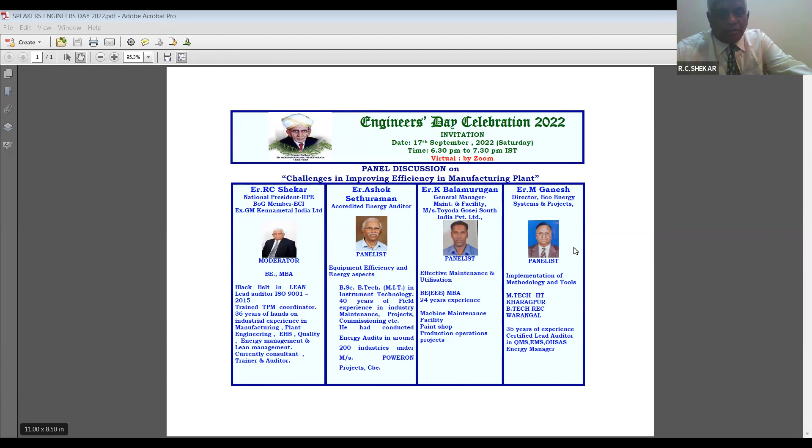Today's topic is improving efficiency and effectiveness of manufacturing plants. This is a very vital subject. Globally and nationally, we have embarked on sustainable development growth with 17 aspects, and this efficient and effective manufacturing plant finds its place in most of these development goals, so this topic assumes great importance.

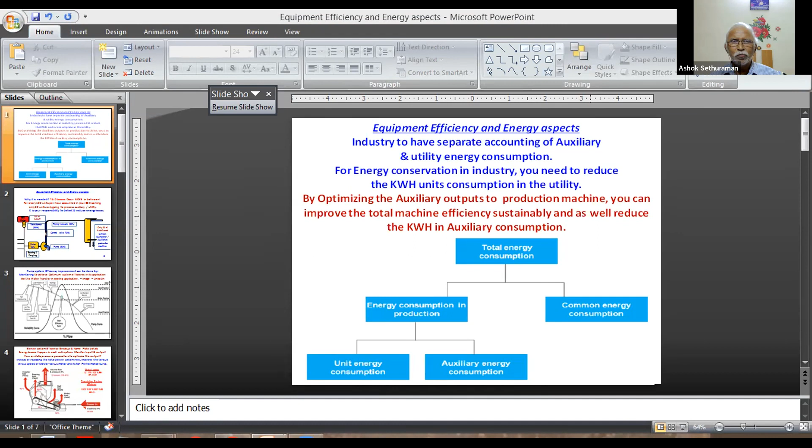Thank you, I'll just share my screen. Is my screen visible now? Yeah, but we should make it bigger, it's still not full view, still not big. In the bottom you have to put this one, the slide, you have to make it full screen. Okay, one second, full screen, you can select.

Equipment efficiency and energy aspects: there are two types of auxiliary consumption, energy consumption, and utility consumption. In the industry, for utilities we concentrate on conservation to reduce units in electricity or energy consumption. Whereas for optimizing auxiliary outputs given to the production machine, there's a basic difference - we can optimize the auxiliaries to maximize output and improve total machine efficiency sustainably. This will also help reduce the kWh, and for the given equipment as a system, the specific energy consumption definitely improves.

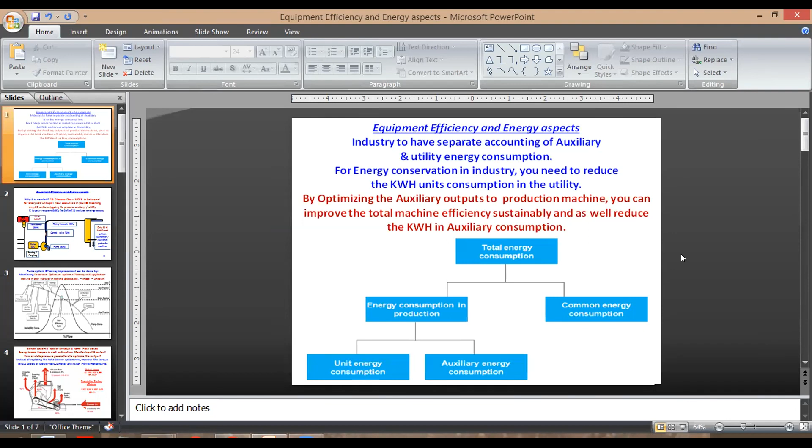If we see why it is to be done - the T&D loss, what is happening nationally is around 20%, and this is happening in the industry also. For every 100 units of your EB incoming, only 30 units is reaching the ultimate process auxiliary or the production machine or production utilities.

We have a scope of energy efficiency at the transformer, at the motor, at the bearings and couplings, or at the linkages, power transmission linkages, then on the pumps, then on the control valves and piping network, then comes to the process auxiliary, the heat exchangers or auxiliaries of production.

Here we find there is a scope, thanks to the latest 5-star ratings for equipment, not just on the domestic side but on the industry side also. We have IE3 and IE4 motors, taken up by many new or latest industries. They have gone for this, going by the National Motor Replacement Program, and are able to replace 10 HP motors and improve upon it.

Then coming to power transmission, many industries are leaving away V-belts and other things. They are going for cogged belts and resizing their pulleys to improve power transmission from the motor to the blower or to the pump.

Then comes the control valves or piping, where the scope is much more, because we have pumped in so much excess energy. The piping has already gone totally scaled and the line size has totally changed as such. If this also needs to be addressed, definitely the system improves a lot.

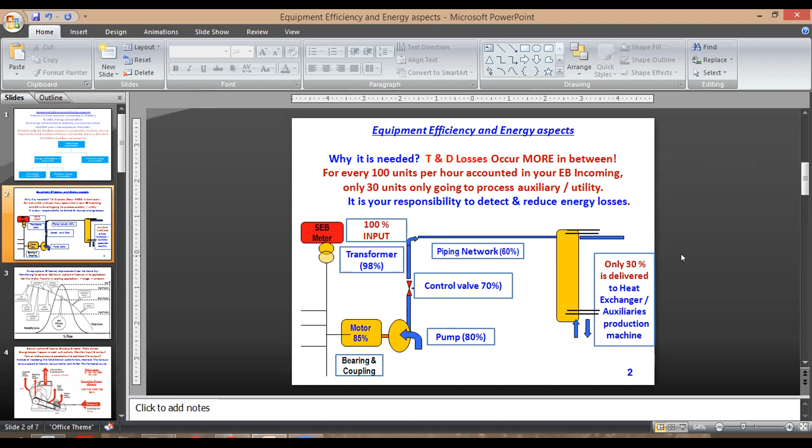Coming to the basic utilities or the auxiliaries, either the pumps or the blowers or the compressors, we can see the optimum system efficiency on the given pump, especially on the water transfer, on the cooling water application, especially on the chillers or any of the equipments where you are using this for this cooling application meant for the heat transfer. The velocity or the flow rate is very critical, where you can see the pump reliability.

We have a model wherein we go by the pump curve, and we see the reliability curve, and we achieve a system improvement by going for the best practice or the ideal practice or the better practice, where you can see the low bearing life of the pump, cavitation is less, and the best efficiency point of the pump is maximum utilized, taking care of the reliability also.

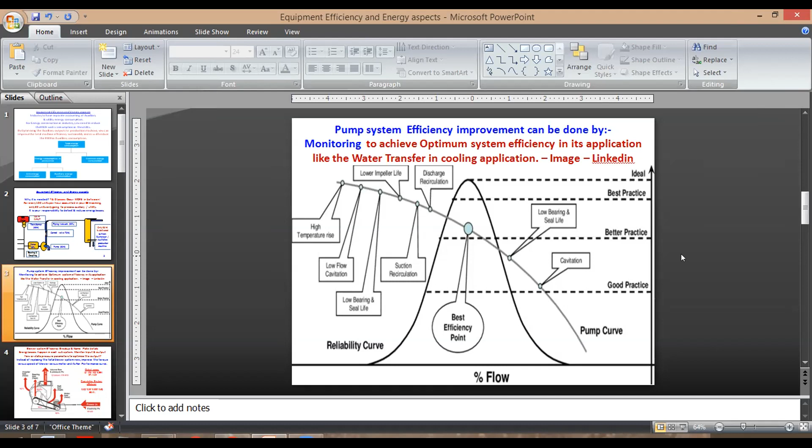This is not only for the case of pump, it includes the pump straighteners, pump suction strainers, and the delivery, where the input and output pipings for the pumps also matter. So replacement of pump alone is not important now. The total system is what matters, that is monitoring the parameters of the suction and the delivery; this also matters to the pump process application, especially whether it is delivering to the equipment or to the production machine.

If you take the case of blowers, again here also the typical blowers running in the industry over decades have only 50% efficiency, though the Bureau of Energy Efficiency says you can go up to almost 70 to 80%. On the existing subsystem itself, we can see the breakup of the energy consumption going by the Sankey diagram of the blower system. If you give 60 kilowatt, almost 92% across the motor efficiency. On the belts and pulley efficiency, it is said it is around 99, but in many places it is losing around 5 to 6% also.

Then on the bearings and couplings, then comes the impellers. The impellers you selected some 10 years back, whether a forward curved impeller or a backward curved impeller, are they delivering the same flow rate and static pressure? So if you find the ultimate cumulative system efficiency is only around 50 to 60%, there is a scope for improvement up to 20%.

So here it is not that we have to replace the total blower system. Even on the existing system, if you are able to improve the efficiency of the subsystems, especially the motor to an IE3 motor, and the belts and pulleys by going for cogged belts with VFD drive combinations, this also optimizes the torque given by the motor to the blower, and ultimately variable torque motors, especially on blowers, centrifugal pumps and even centrifugal compressors.

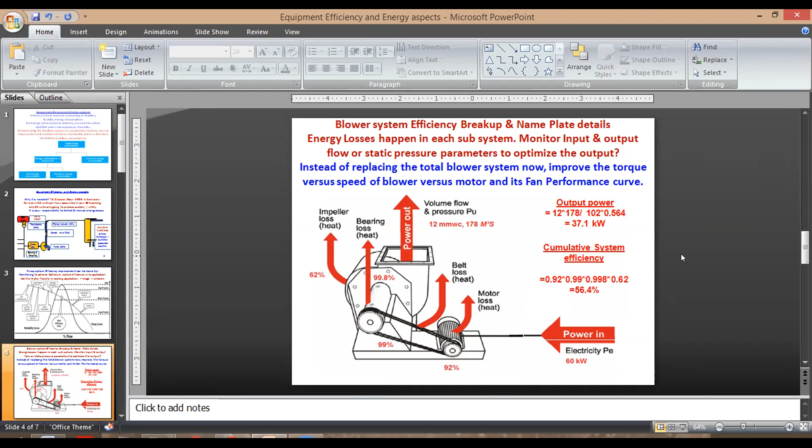For all these motors, blowers, pumps or compressors, the ambient air surroundings are more important. If you see the relative humidity, especially in our Indian conditions, between 50% humidity and 80% humidity, the kg of water vapor per hour for every 1000 cubic meters per minute almost doubles.

So the cyclic and seasonal RH variation in the ambient surroundings, between day and night and season to season, makes a big impact on the blowers, the compressors, and the cooling towers, wherever they make use of the ambient temperature and RH. So there we have to take care, monitor this and improve the subsystem efficiency on the blowers, the compressors and the cooling towers.

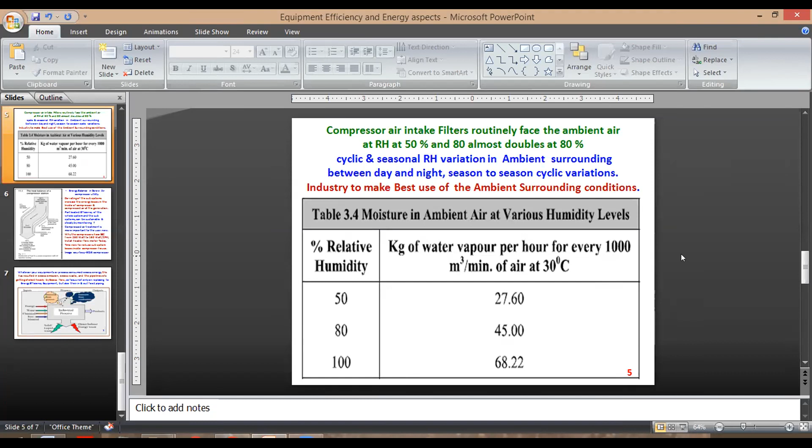So if the real output from the compressor is only around 12% of the compressed air, then we have to take care of the subsystem efficiency, like air intake: what is the air intake temperature and air intake RH, and how much the air intake filter can choke or give a maximum delta P. That has to be reduced, so it is made free air delivery at the air input of the given compressor. And also the part load efficiency of the compressors.

Normally, if you see all the compressors as a package running at full load, a 75 kilowatt machine delivering around 500 CFM is almost taking 95 kilowatt, because it is rated for 7 bar; still the total package is taking around 95 kilowatt. In many of the industries, they have started replacing the motors, especially from 75 kilowatt to 90 kilowatt motors, and they are able to save energy. And if you are trying to buy a new compressed air system, go for a higher pressure and operate it at a lower pressure.

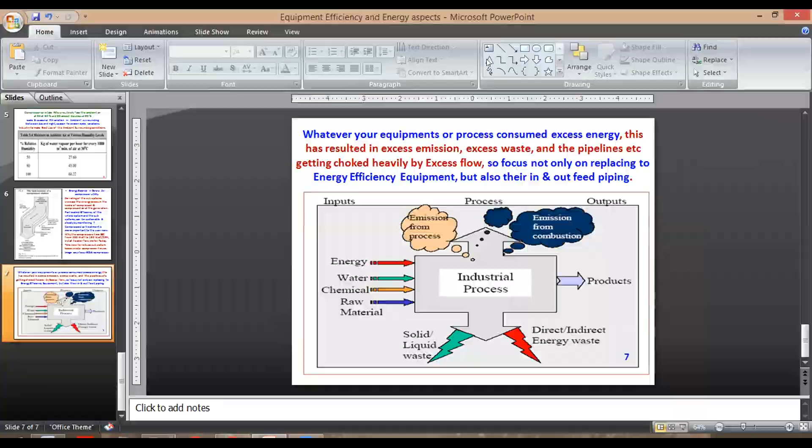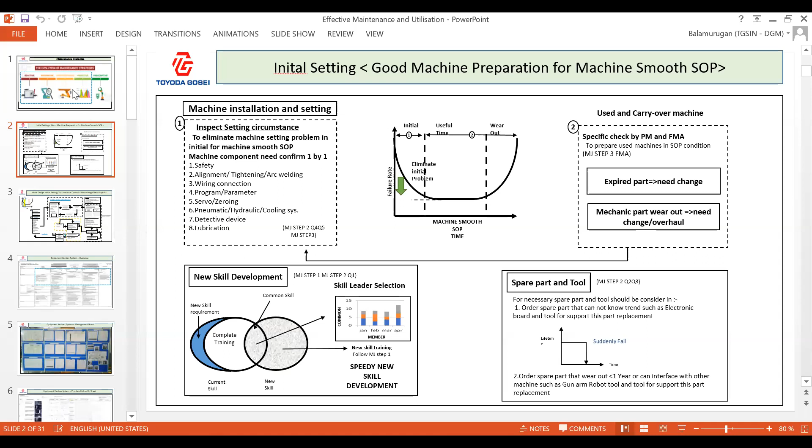So, Mr. Ashok, can I now request Mr. Balamurugan to do his presentation? Mr. Balamurugan? Yes, sir. I will do my presentation. Thank you. So my screen is visible? Yes.

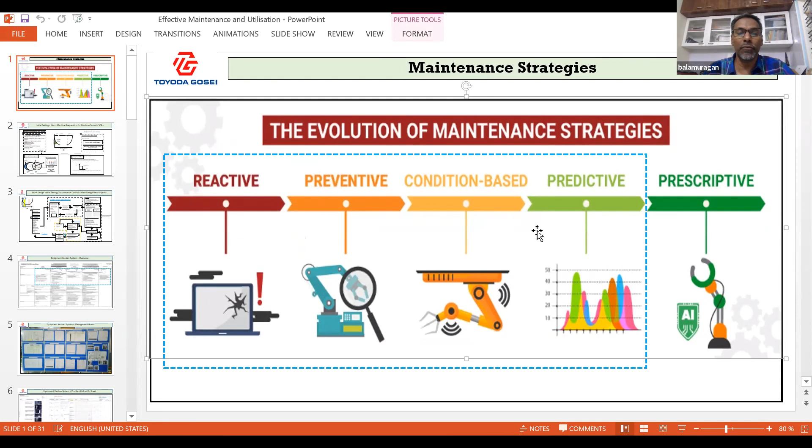This is the evolution of maintenance strategies happening globally in the market. One second. As TGSIN, we are still around reactive, preventive, condition-based and predictive maintenance. We still have a long way to go for prescriptive analysis, which is basically AI-based. But definitely by 2025 we'll be reaching that with respect to equipment, considering the skilled manpower in the future. This is one important factor for any maintenance.

This is a slide which shows the basic necessary requirements for any maintenance activities. We call it the initial setting. Good machine preparation for machine smooth SOP. SOP is smooth operation. There are 4 factors that we need to consider. One is machine installation and setting.

Any machine, when it is installed properly at the initial stage with all the conditions, with all specs and confirmations, then the problem at the initial stage itself is very low. Only the wear and tear comes into the picture. So this plays a very key role.

Here, inspect setting circumstances to eliminate machine setting problems initially for machine smooth SOP; machine components need to be confirmed one by one. How we confirm is safety, alignment, tightening, wiring connection, program parameter setting, servo zeroing, pneumatic, hydraulic, cooling system, detective device, and lubrication. These are the basic confirmations during machine installation.

Next, this graph shows the failure rate on the y-axis and machine smooth operation time on the x-axis. After SOP, you can see the wear out of the machines. Here, what is it that we need to do? This is for the used and carry-over machines. Once this stage comes, how to take care? That is by specific preventive maintenance through failure mode effect analysis.

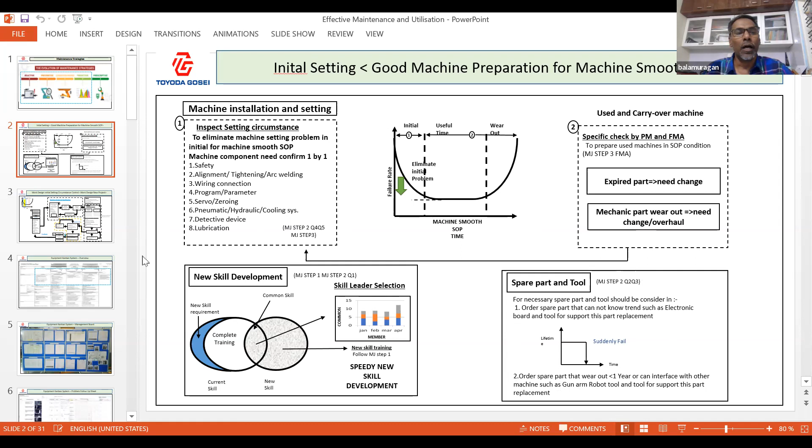So these are the 4 factors which need to be considered for good maintenance of equipment before we hand over for production, so that the problems will be less. And before that stage, we call it the design stage. This is what we follow: the work design, initial setting, circumstance control. One is the initial, then useful time and the wear out time. Considering this as a factor, the target is smooth machine SOP, 0 setting mistakes, 0 long time repair.

And what is the source? Feedback from previous projects. For any new machines, when we are buying similar machines, what are the reflections we need to take based upon the previous equipment, what we failed to incorporate? That should be the reflection. Here, from machine breakdown history, equipment installation standard, the new machine drawing and manual, technical confirmation, Yokoten based upon others. So this is the key source which we need to consider for new machine spec.

And when it comes to machine design and specification, issue machine design feedback by history and Yokoten. Same machine and portion Yokoten, in terms of safety, machine infrastructure, requirements on the design feedback sheet. This should be filled up. Next comes the discussion with PE, plant engineering, and process design, drawing confirmation by the maintenance team, and issuing the problem punch list back to the design team. So this is how the PDCA works.

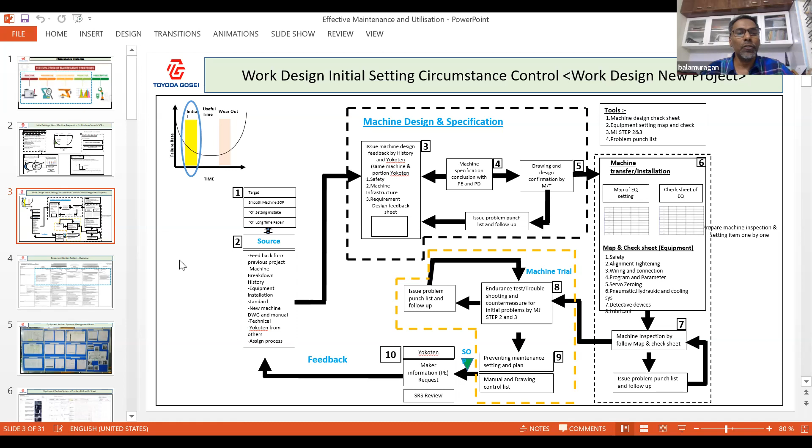So with this base, what we follow at Toyoda Gosei is, as you can see, a Kanban system for equipment. When a machine is being procured, ordered, and when it has come to the site for installation, we have 4 types of Kanban: white Kanban, pink Kanban, yellow Kanban, and green Kanban.

White Kanban is the equipment confirmation before the power-on condition. That is, whether the equipment has come in the right shape, since even in transit some damage can happen. So before pre-start of the machines, this type of checking will be done. We have a checklist which I could not share now because it is a detailed check sheet.

And pink is mainly to confirm the safety function check. Once the machine is installed and confirmed by the project in charge, the safety function check will be done by the project in charge along with the safety department. The yellow Kanban means it is tuned for production, where the trials will happen and the production trials will be fine-tuned. And the green Kanban means the entire function check and quality confirmation. Finally, handover takes place with the proper PM check sheet and the quality confirmation.

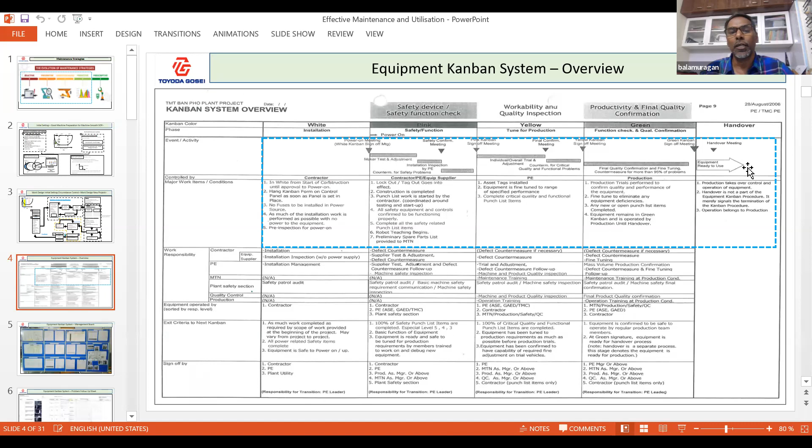So any equipment installation speaks only about the final part quality. In the detailed sequence of the cycle, starting from equipment installation, the quality of installation, the quality of activity, the quality of skill, everything is visualized, evaluated, and then handed over to production. This is the system that we also follow at Toyoda Gosei.

And this is just an example of what we have. Sorry, it is not clear. This shows the entire equipment installation schedule. This is the Kanban system. This is the pre-white Kanban check sheet. We have white Kanban, then pink Kanban. Then we have the problem follow-up sheet, followed by many static checkpoints. Then comes overall equipment safety and maintenance, like a PM check sheet, and handing over the machine to production and maintenance personnel. So this is basically to ensure the machine is made perfect and handed over to the respective process owners.

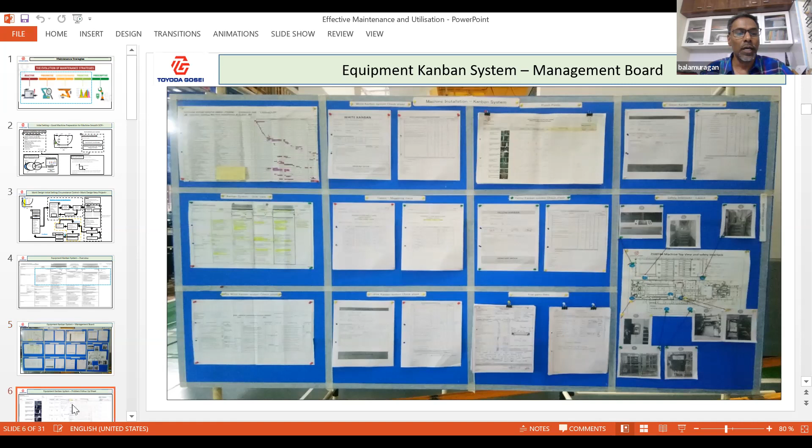And this is one example of the PFS sheet, which we call the problem follow-up sheet, for any new equipment installation or any equipment preventive maintenance. After that, for any equipment, first, safety is very important. This we call STOP 7+1. We call safety in Toyota the Zero Accident Project.

I think most of the people attending the program will know about A, B, C, D, E, F, G, H. A is actuator. Actuator means being caught or pinched by any rotating equipment. B means big or block, contact with a heavy object. It may be any tool moving, like loading of a press tool or an injection molding tool. C is car, contact with vehicles. Inside a factory, we use forklifts and towing trucks, so contact with vehicles is called car.

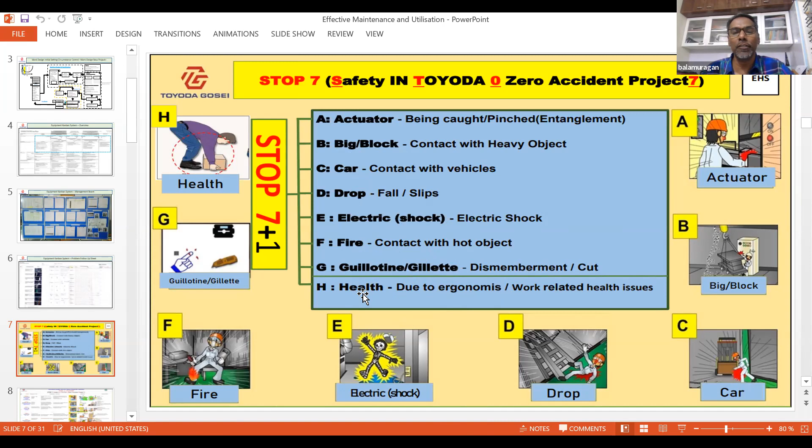And D is drop. Any load that slips from a height is called a drop. Electric is related to electric shock, and fire is related to any fire. It may be an electrical fire or any other, like a paint fire. G is Gillette, any cut injury. And health is ergonomics-related issues. So we take these STOP 7 steps in equipment inspection, and we ensure the equipment is handed over with all these basic safety features, so that it is good for maintenance personnel and production when they handle the machines.

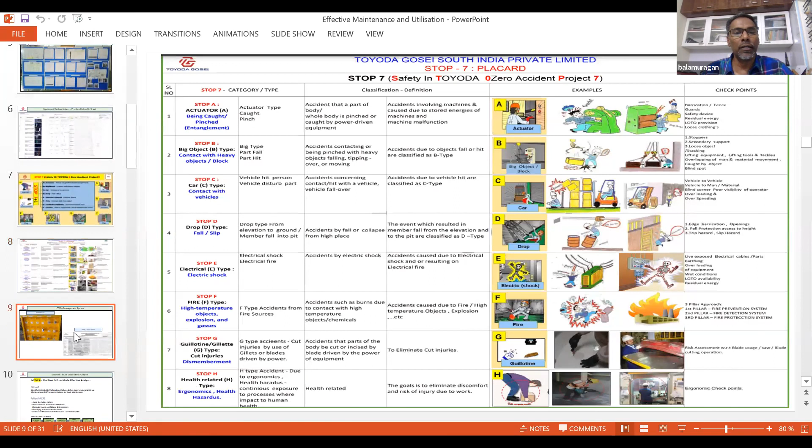These are a few explanations. Since we are short of time, I am skipping this. For any equipment, the LOTO system is very basic. This is our LOTO system board. LOTO we call lockout tagout. For any equipment going for maintenance, maintenance personnel should have the lockout system. He should lock out so that the control circuit is de-energized, and he can enter the machine safely, do the maintenance work, and come out.

And this is the sample daily check sheet for the LOTO board. When any person comes in, he takes the LOTO along with him, and when he completes his shift, he puts back the LOTO and enters it, which we call in and out.

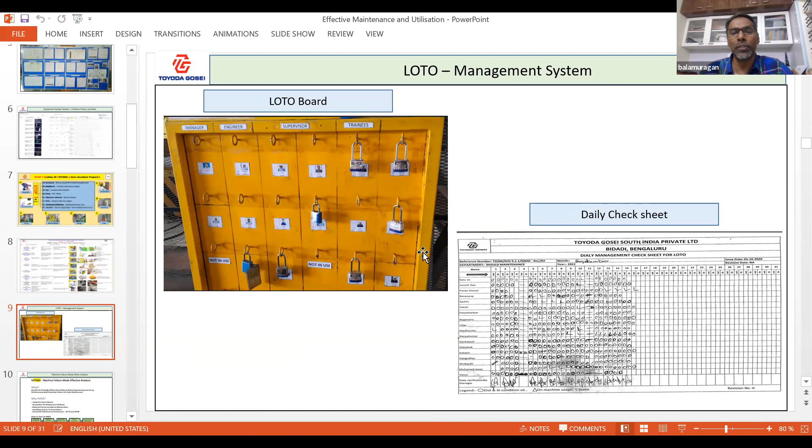So this is the safety management system that we follow for all the maintenance personnel. And I request all the companies to have such type of system, because many accidents what we see are due to the energy or power breaker just being switched on. For bigger machines, a third-party entry will almost always be there. So this type of system should be there for maintenance personnel before entering the machine.

And as equipment, we call it machine failure mode effect analysis. So this is a very key important point. Here it is to avoid future failures, standardize the maintenance method, eliminate forced and natural deterioration, identify the actions on each failure, and control the maintenance performance through MTTR and MTBF.

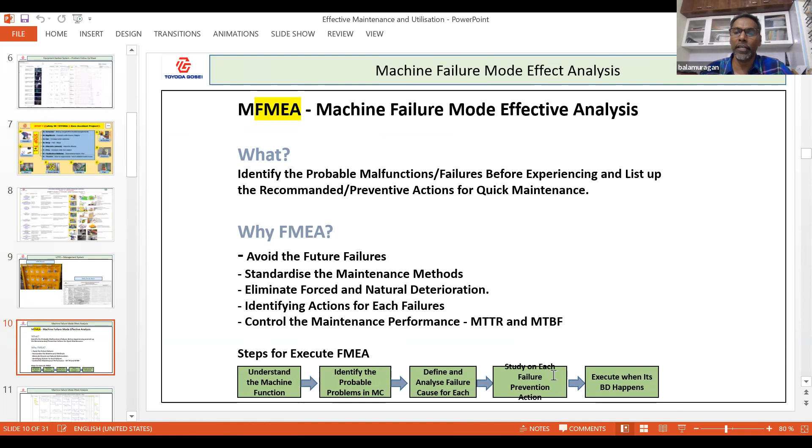And these are the basic steps which have been executed for machine FMEA. Understand the machine function, identify the probable problems in the machine, define and analyze failure causes for each, study each failure with preventive action, and execute when the breakdown happens.

And this is one example of what we do for FMEA for the machine: potential failure mode, probable causes, potential failure effect, prevention method, and recommended actions. We arrive at severity, detection, occurrence, and prevention, and we categorize based upon the RPN rating. So this is just an example. I think most of the companies will be following it.

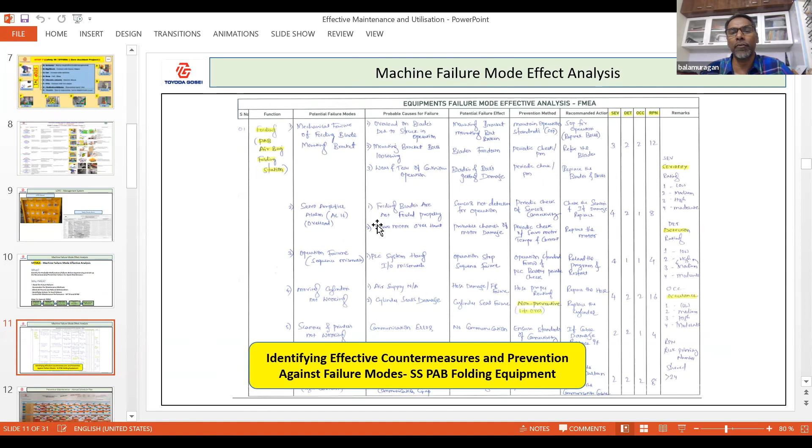So this is the very basic step for any equipment maintenance, how we arrive at some basic predictive or preventive checkpoints. And this is the sample check sheet, like a preventive maintenance annual schedule plan, what we have. For any injection molding machine, there should be an annual plan. So this will be made before, like in January or February, for the next financial year.

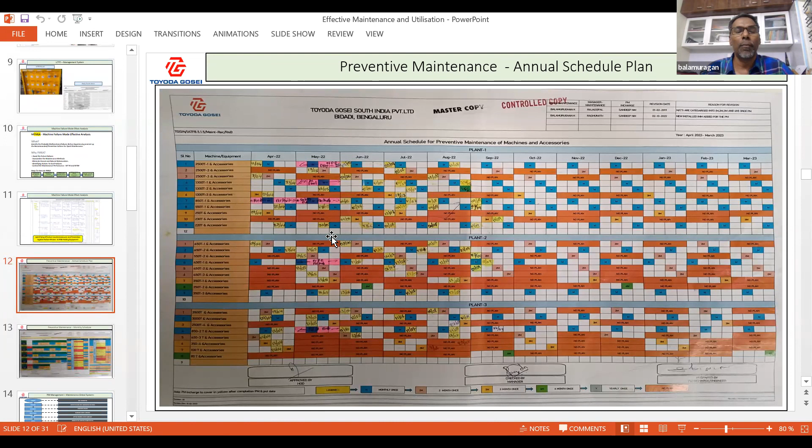We follow the financial year for the maintenance, and this will be circulated across the production functions to hand over the machines based upon the dates. 90% it happens, 10% it may not happen due to the production schedules, but that will be caught up during any holidays. And this is the monthly plan.

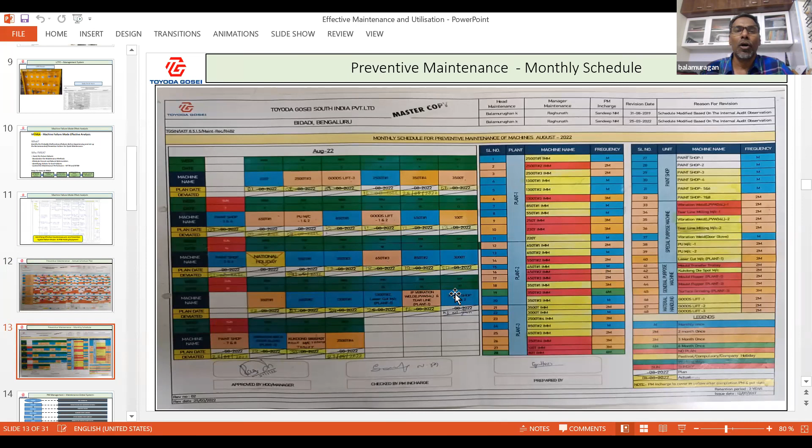Apart from the yearly plan, monthly, based upon the production volumes and any breakdowns, small changes will be there. So monthly schedules will be almost 99% perfect. And this is how we follow TGSIN, how we take care of the monthly schedule plan. And before we go to the check sheets, these are the basic minimum content that we need to have as a preventive maintenance management system.

This should be based upon the criteria. The company can have their own criteria in-house. So we have our own criteria for the PM checking of machines. It is not that every machine will be going for a check every month. Some criteria are fixed.

Why I have taken the contactor is, our target is zero fire and zero fatal. And due to contactors, many fire incidents happen in equipment. So we give more importance to electrical contactors, relays, earthing resistance, and insulation resistance in machines, which are checked periodically.

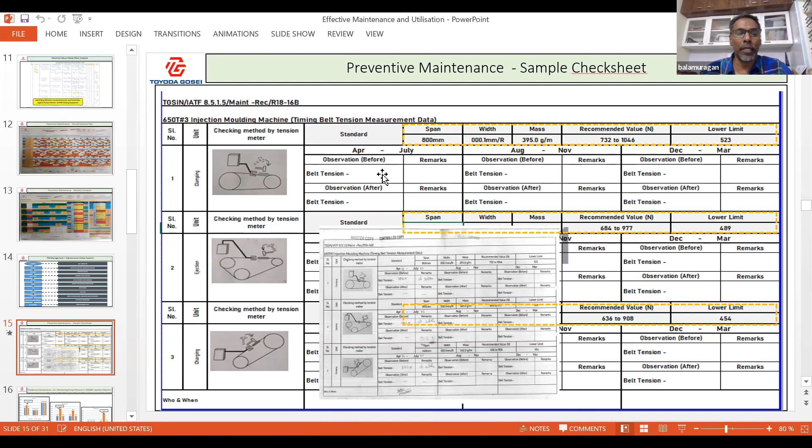But nowadays this has been converted to sensor-based and AI-based monitoring, and we take the data directly from the machine. So this is how the trend is changing. But these things need to be monitored to see that the machine is not being pushed to breakdown, so that we can take predictive actions.

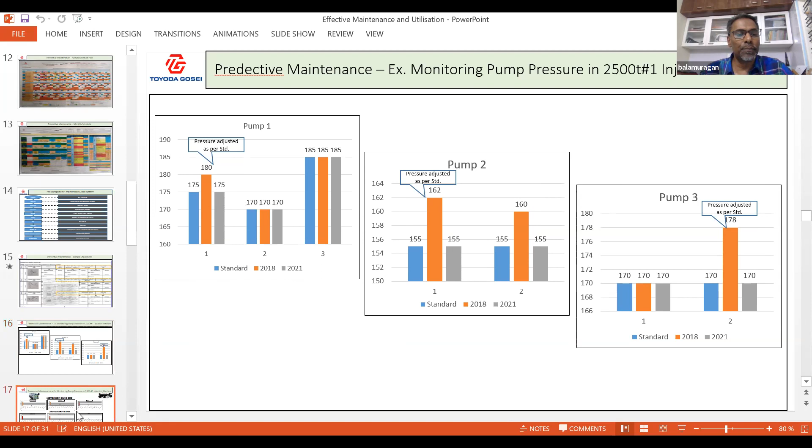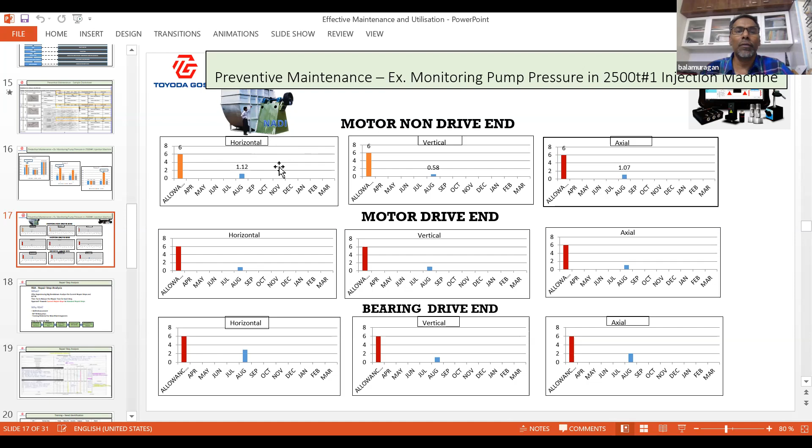So many blowers we use in the paint shop, so it is a very huge task. Based upon the data, we take actions so that the maintenance time can be minimized, and maintenance personnel also can be minimized. This is indirectly a cost cutting, but it is a digitalized data-based approach.

Next, we call this repair step analysis. After experiencing a big breakdown, we analyze the current repair steps and mean time to repair. Then we try to reduce the repair time for each step, approaching the current repair steps toward standard repair steps.

What is root repair step analysis? Skill enhancement, MTTR reduction, and training material for new maintenance engineers. This is one of the key factors everybody should think about, because skill and knowledge based upon experience is most important. So the steps involved are: understand the actual root cause of the problem, list out the current repair steps, think about repair step reduction, and compare with the corrective action and the standard action.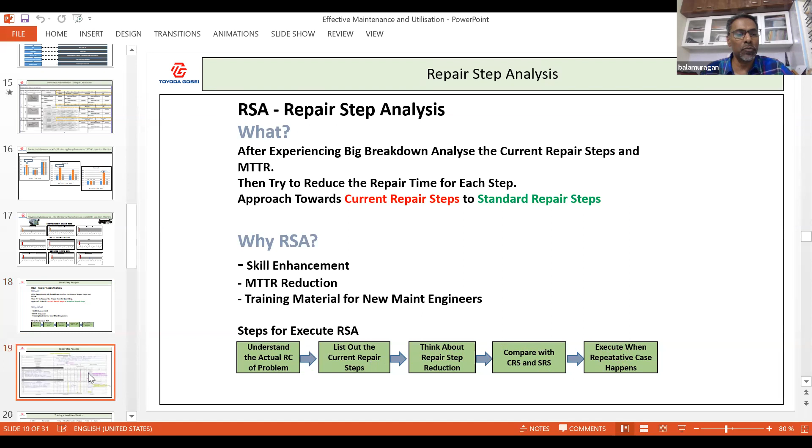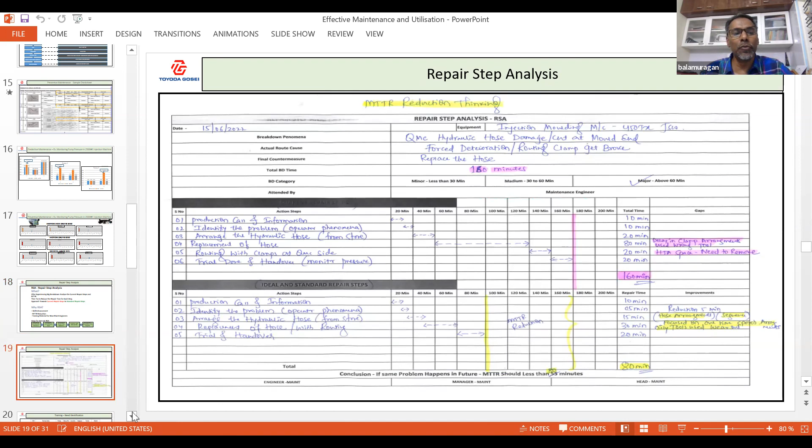Execute when a repetitive case happens. This is one sample check sheet showing before and after, with a Kaizen point reducing from 160 minutes to 80 minutes, so that this becomes the standard and the mean time to repair can be minimized. So to do this, skill is most important.

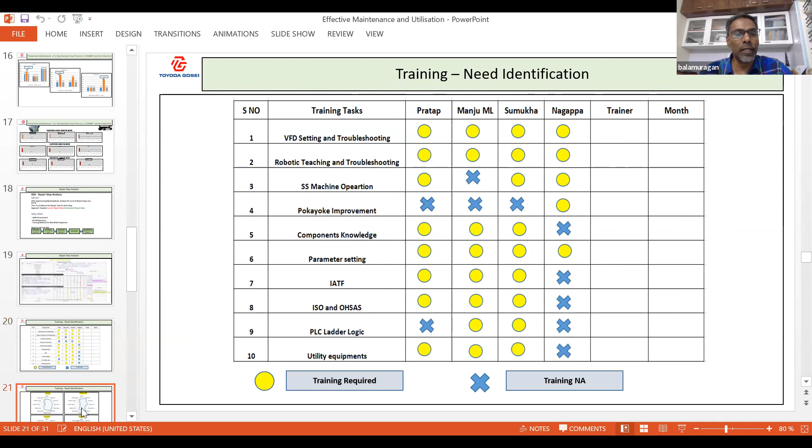Any company should have a training need identification for maintenance personnel on various aspects for the members. This is just a sample sheet I am projecting here, showing the training tasks needed across each member, what is the current level today, and where they are going to reach over the years. For example, today by 2022 if the skill is like this, by 2024 or 2025 what is the expectation and what it's supposed to be. So this is how we monitor the members' performance with respect to maintenance.

So I have touched upon training. Next comes spare parts management. We are on SAP. Whatever spare parts we define are based on VED analysis: vital, essential, and desirable. Based upon that we make the list, and we order the spares with the reorder level we have defined, and the lead time, and it gets ordered directly through SAP when the stock goes down. This is the system we have at TGSIN.

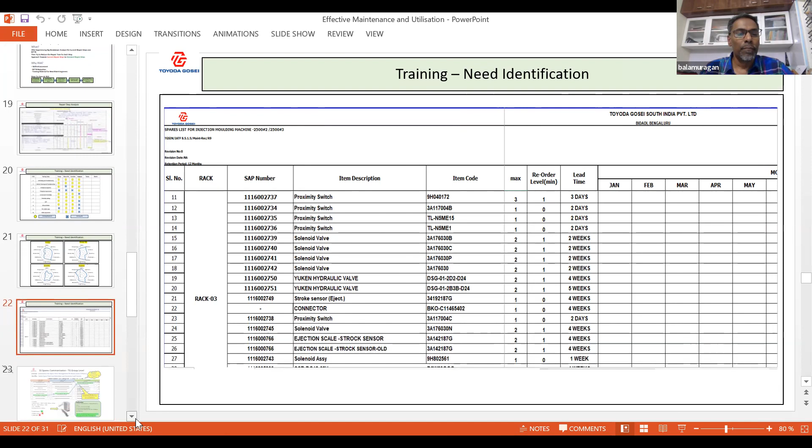The next slide shows energy monitoring and smart production monitoring system to improve OEE. Now OEE basically speaks to productivity, quality, and availability - performance, quality, and availability. For example, here it shows availability as 43%.

On manual data, whatever we do, a lot of mistakes happen, or it gets wrongly projected. We have connected injection molding machines to cloud computing to take the data. And for each product we have a QR code, a laser-printed QR code, and every product is accounted for through a reader, which is directly linked to SAP, so that we get the right production count, right energy reading, and right hourly monitoring.

So when availability is 43%, then actions come from production, identifying where the problem is and what actions we need to take.

Most of the problems, everybody says maintenance issues, but maybe the planning is not good, or there is member absenteeism. This gives the real-time data on where the problem is and how to act upon it. It also gives data on energy, like which machine has higher consumption, which has lower consumption, and why the per hour production loss is there.

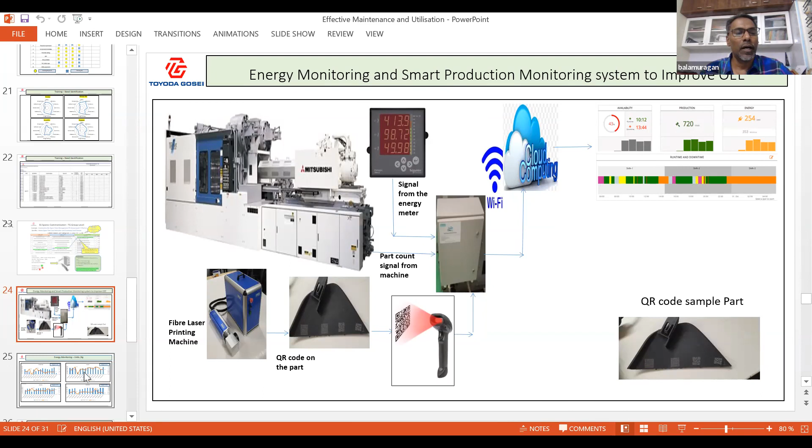So this type of data we arrive at, and this is one example of how we arrive at units per kg for injection molding machines. This is like 4 machines we have taken as an example and are projecting here. The target is 0.35 units per kg, but what actually happens is like this, and even on Sundays some units are consumed. This is called low hanging fruit, where we need to project to production and inform them why the machine is simply on during Sundays. That should be the first step.

Then when we fix a pattern every day, like Monday, Tuesday, we have a standard pattern, not every day different mold changes. We have a pattern. So if it is the first Monday, again the 6th or 7th, it should have the same energy consumption. Why is there a variation? This needs to be analyzed and informed to production, what is the downtime? So this type of data needs to be utilized to take corrective actions.

So this is how we are currently moving on, and this will improve the efficiency and OEE. This ends my presentation. Thank you.

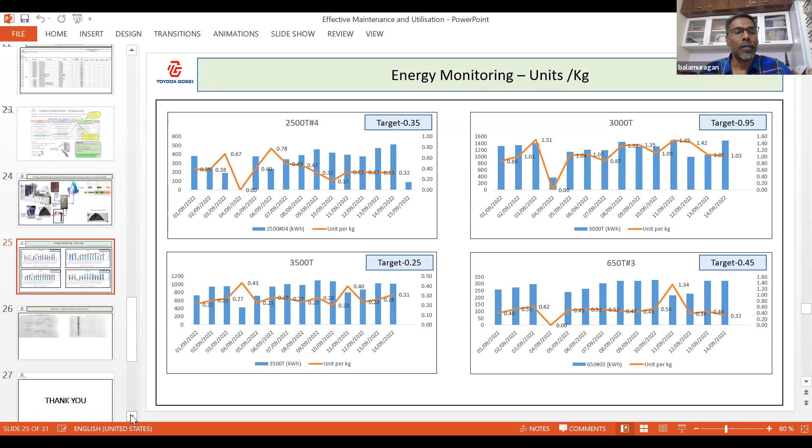Good evening everyone, thanks for giving the opportunity to do this presentation for celebrating Engineers Day. The time available is very limited. I had actually prepared for a longer duration, so I'll be skipping some of the slides, even though I wanted to tell more. Sorry for the inconvenience if I skip some slides. So the idea is improving the efficiency in manufacturing plants. Today's topic theme is challenges in efficiency in manufacturing plants. What are the challenges? Let me go into that.

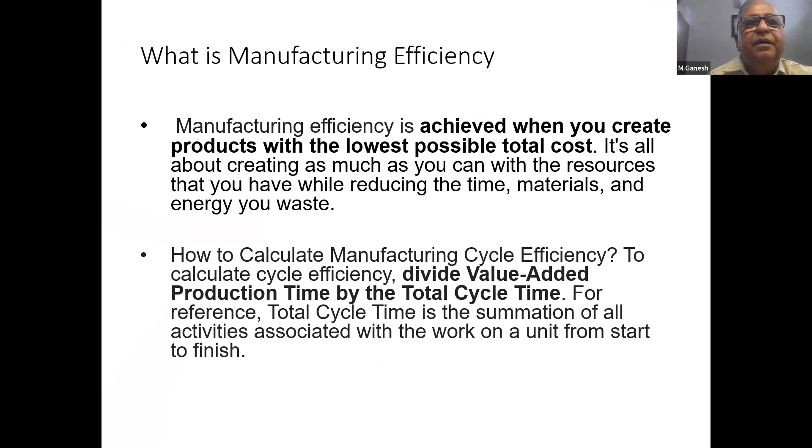Before we understand this, manufacturing efficiency is achieved when you create products with the lowest possible total cost. It's all about creating as much as you can with the resources you have while reducing the time, material, and energy you waste. That is the basis of manufacturing efficiency. It can be calculated by means of a standard, in terms of actual output to standard output, and the ratio gives you the efficiency.

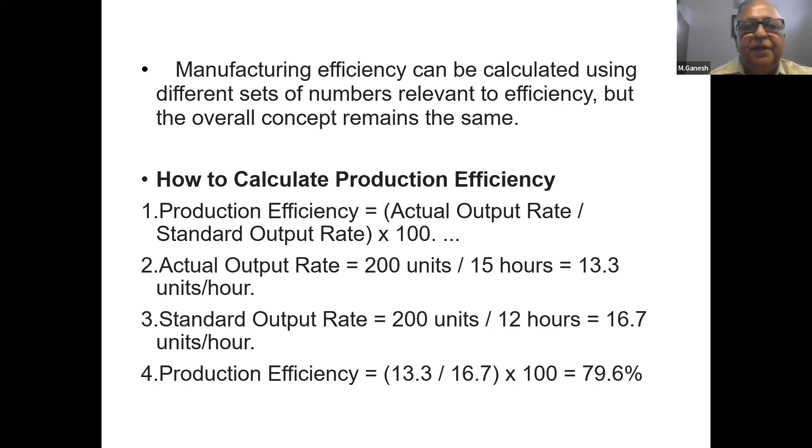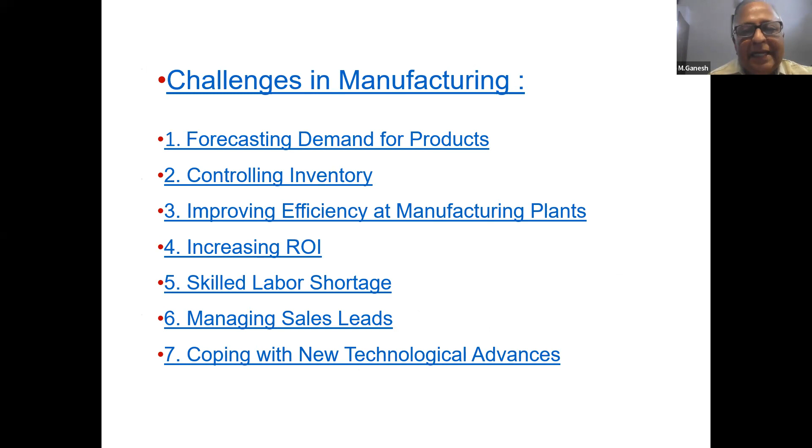First, basically, an overall system has to follow a certain standard. I prefer ISO 9001:2015. This quality management system gives you a very good guideline to ensure you can set all the activities right, from the start to the final product delivery. We have to ensure process procedures, flow charts, operating control procedures, and SOPs are available for how you have to do various activities.

There has to be top leadership commitment, and respective unit heads and role responsibilities have to be very clearly defined so they know the job they have to do, with no conflict of work activity. And to improve, there has to be objectives and targets. We have to set targets so that gives guidance for achieving certain set targets in terms of quality, progress, and no defects.

Risk assessment is again a very, very important parameter. We have to know, during the entire process of manufacturing, what are the risks actually there. We have to assess the risk and determine the mitigation plan. Communication has to be made very clear, so who will communicate what and to what extent.

Another important parameter is internal audit and management review. So we have to do a complete thorough audit of the entire process, checking for various drawbacks and non-conformance to the set procedures. And finally the improvement part, what we have to do next to improve the manufacturing efficiency.

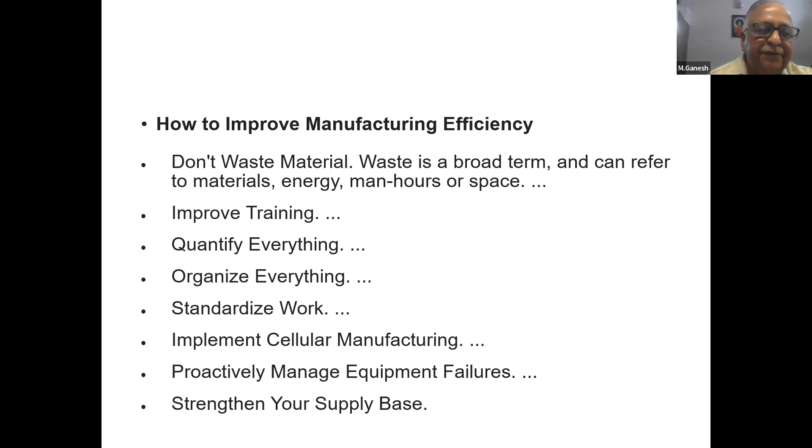Strengthen your supply - that is all our supporting service providers, the suppliers, vendors and contractors. You have to have a very good link and relations so that they provide you, because these are the extended arm of your manufacturing. They have to have a very good relationship to ensure that your components or other services are available at the right time.

So this also I'll put - basically where are the different processes which are there? Normally in automotive industry we use Kaizen. Kaizen is a very common term used by the Japanese for continual improvement. This lean manufacturing tool dictates a process to be continually improved in order to eliminate waste and boost efficiency.

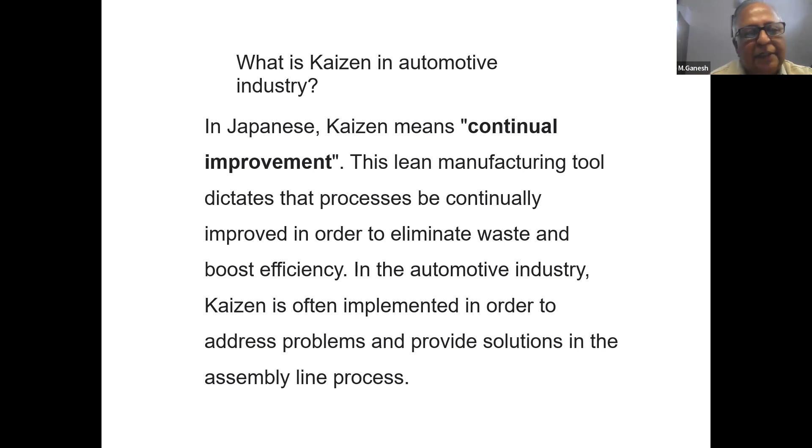In the automotive industry, Kaizen is often implemented to address problems and provide solutions in the assembly. There is a bit of difference between continuous improvement and continual improvement, because they're commonly used in different ways. Continual improvement is improvement that goes by means of steps, whereas continuous improvement is continually improving, which may not be possible. So we have to reach a certain level of target over a period of time, and go to the next level by means of engaging additional resources or different manufacturing processes.

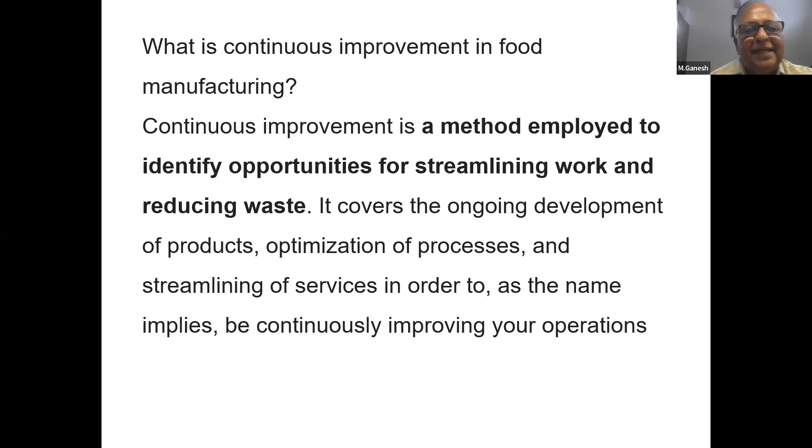This is the continuous improvement method employed to identify opportunities for streamlining work and reducing waste. It covers ongoing development of products, optimization process, streamlining of services in order to continuously improve operations. Particularly in food production industries, the more important things are innovative instruments, digitalization, maintenance and cleaning - which becomes very important due to hygienic conditions - and optimization to reduce cost and increase productivity.

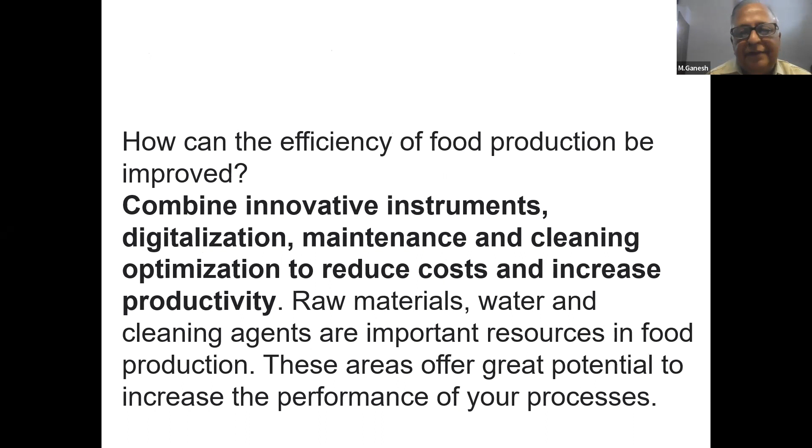I'll just touch upon all the various factors which we said are the challenges. First is don't waste material - waste is a broad term and everybody knows that. So Lean offers a set of tools to help manufacturers actively improve efficiency through systematic reduction of waste.

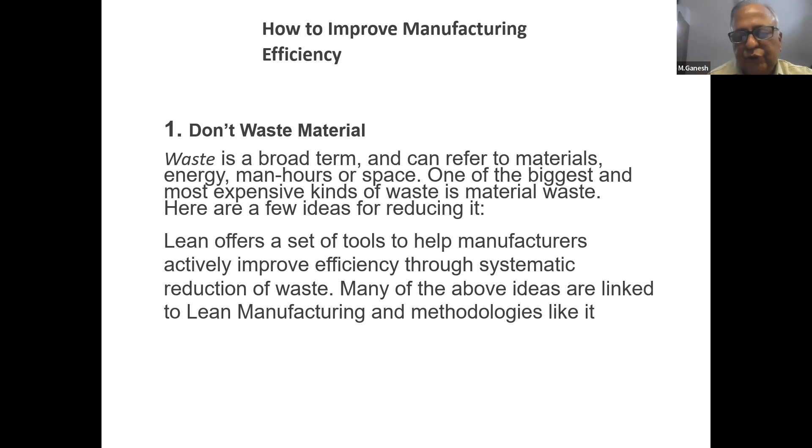Many of the above ideas are linked to lean manufacturing methodologies. Here I will give you the basic description, and later we can look into the actual block diagrams to understand better. Next is we focus on design material waste, because design is a very clear, important aspect in which we can ensure that waste becomes very less, or we can avoid the waste also. Designing parts using methodologies like value engineering and design for manufacturability can drastically improve the yield.

Recycle scraps - how to use certain materials for some other purpose, so that we can avoid wastage as much as possible. Even if you cannot use the recycled material, you can sell it to a factory where other organizations or manufacturers can use it as raw material for their own internal purposes.

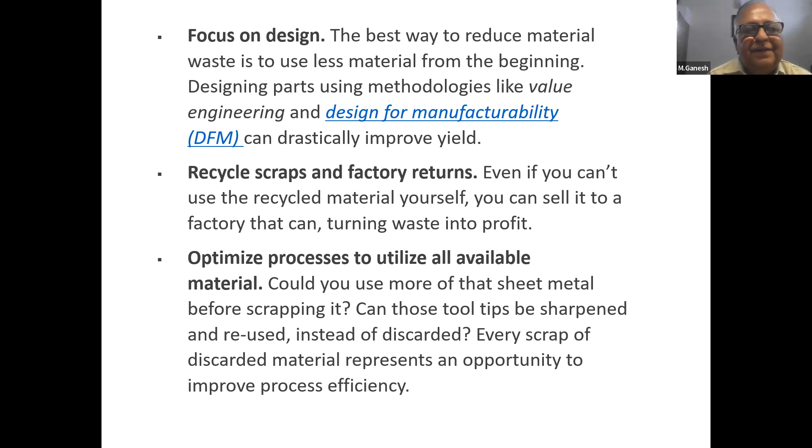Optimize the process to utilize all available material - so we use more of the sheet metal before scrapping. Can these tool tips be sharpened and reused instead of discarded? These are the questions which will come up during that process, so you have to ensure that optimizing the process will avoid wastage. And basically, the other thing is to look at the shipping department, where we have to ship the materials or the transport.

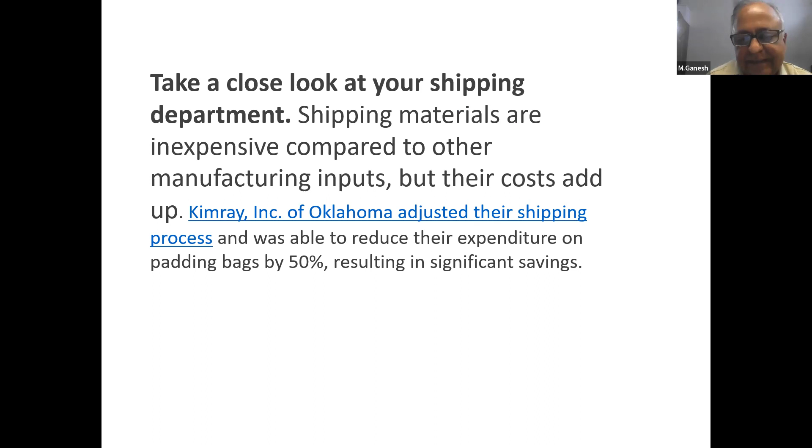If we can manage it in a better way, so if our logistics or supply chain management is good there, then we can avoid a lot of wastage happening, or the energy efficiency which will go into wastage in this transportation. So the second aspect is improved training.

Training is very important there. When we say training, we have to ensure the people or the employees are competent to perform their jobs. When we say competence, it means he is quite knowledgeable and able to produce the desired or intended output as needed. So that kind of training is needed. We have to take stock of and understand the employees' present strengths and their understanding of doing their jobs.

So find out how they can help one another to troubleshoot. Also, the employees who are well experienced can form a group to find out the ways in which they can improve the efficiency of the activity they are doing. If everyone on the factory floor has a good grasp of the entire process from start to end, they'll have a better understanding of the rules.

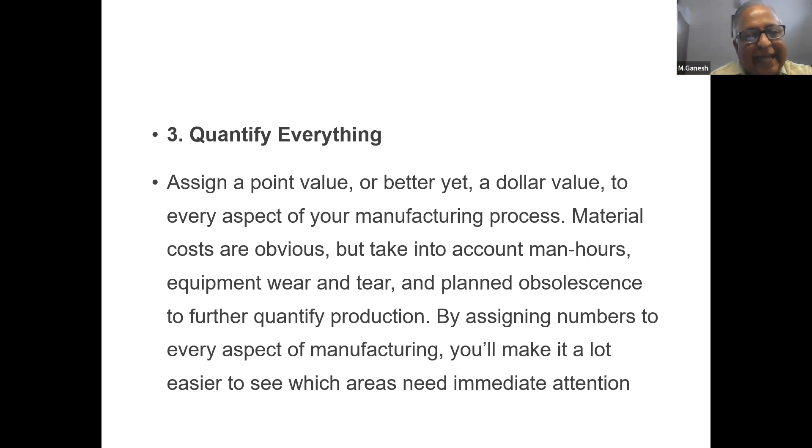Next is quantify everything. Whatever we are doing, assign a point value to every aspect of the manufacturing process. Material costs are obvious; take into account man hours, equipment wear and tear, and planned obsolescence to further quantify the production. By assigning numbers, you are able to get better control of where it is going beyond our planned requirement, wherever the extra is coming, in terms of time also.

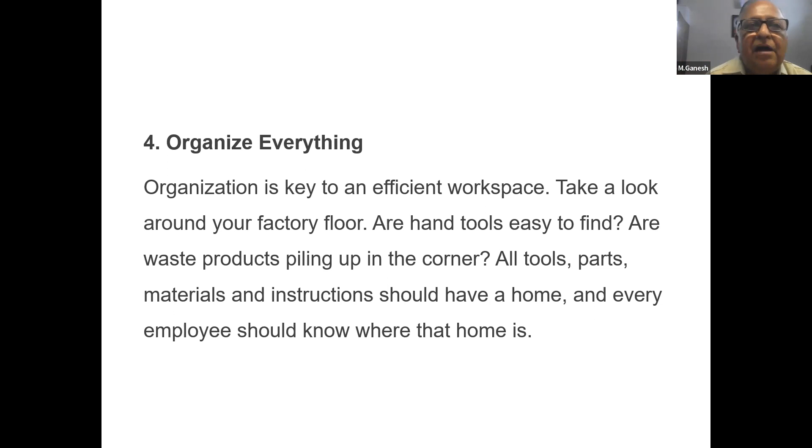So organize everything. Organization is key to an efficient workspace. Take a look around the factory, the layout and the tools, different methods like time management and process management, or hand tools easy to find, waste products piling up in the corner. Suppose we find a lot of waste products piling up; we have to find out the root cause of all those things. All tools, parts, materials and instructions should have a home, so we have to identify the location so that nothing has to be searched for or is lost in manufacturing.

Standardize the work. When we say standardize, as I said in the beginning, the ISO system gives you the proper process procedures, which define each activity or process very clearly in terms of manufacturing, testing, the tools required, and instruments. And when you do the testing, what are the allowable limits, so whether it is exceeding or below that has to be taken into account.

So standardize the work. There's not a lot of room for individuality. Even simple tasks should be standardized to maximize efficiency. Start with the method: we can make a checklist and place it at each workplace, then make sure every employee does the job in the workflow as per the checklist.

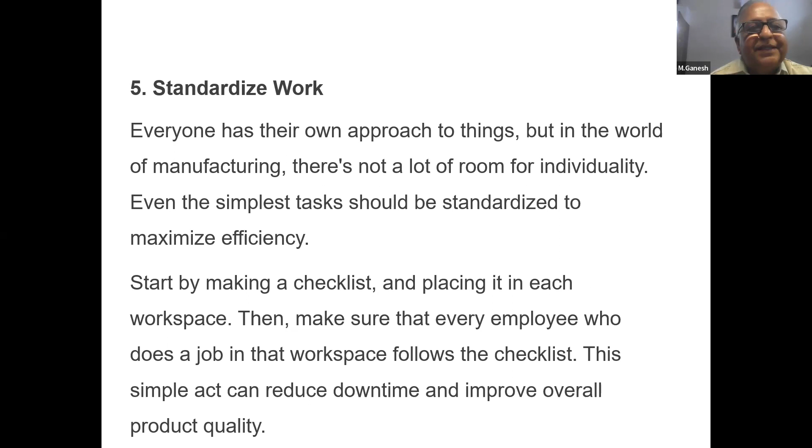Another aspect of improving efficiency is cellular manufacturing. The cellular manufacturing methodology involves dividing the workspace into cells and assigning each cell a standardized set of tasks. Machines and employees in each cell might be capable of carrying out a wide variety of jobs, but this allows them to focus on a single job process. So this is another way of making an improvement.

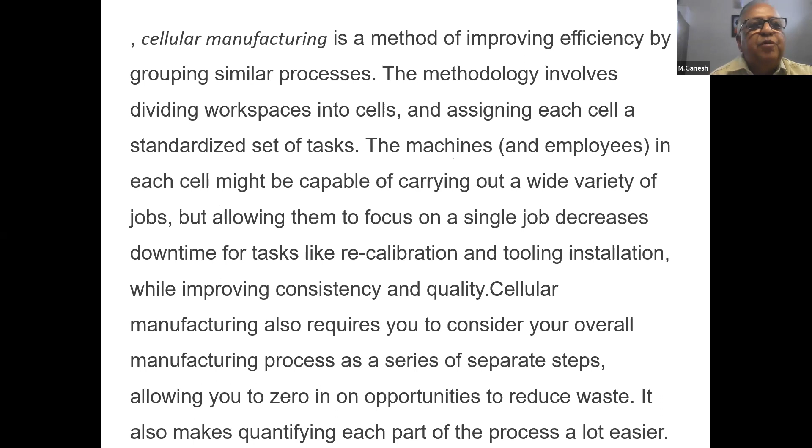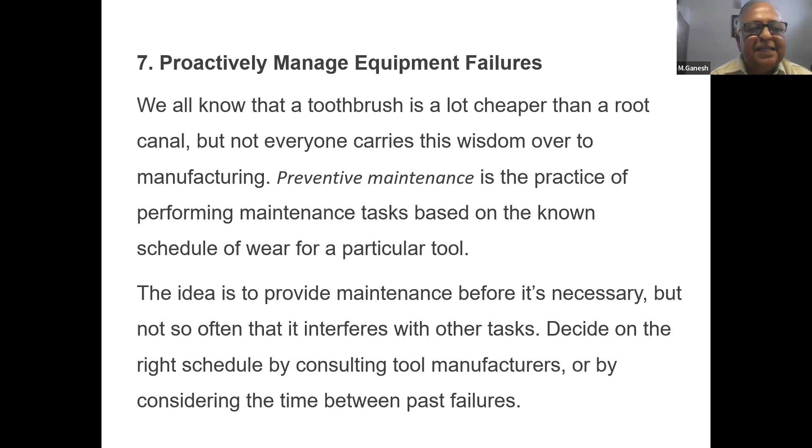And proactively manage equipment failures, before any equipment really fails; we should avoid breakdowns and reactive attention as much as possible. We all know that a toothbrush is a lot cheaper than a root canal, but not everyone carries that wisdom over to manufacturing. Preventive maintenance is the practice of performing maintenance tasks based on the known schedule of wear for a particular tool. The idea is to provide maintenance before it is necessary, but not so often that it interferes with other tasks. Decide on the right schedule by consulting tool manufacturers.

Then strengthen your supply base. When you quantify your manufacturing process, be sure to take a close look at your suppliers. If some are consistently providing better materials, parts or tools, give them more business. This is another place where quantifying comes in handy. Sticker price is hardly ever an accurate indication of the true cost. We also have to look at the supplier base in terms of cost, quality, timely schedule, good communication, and supporting you for any urgent needs.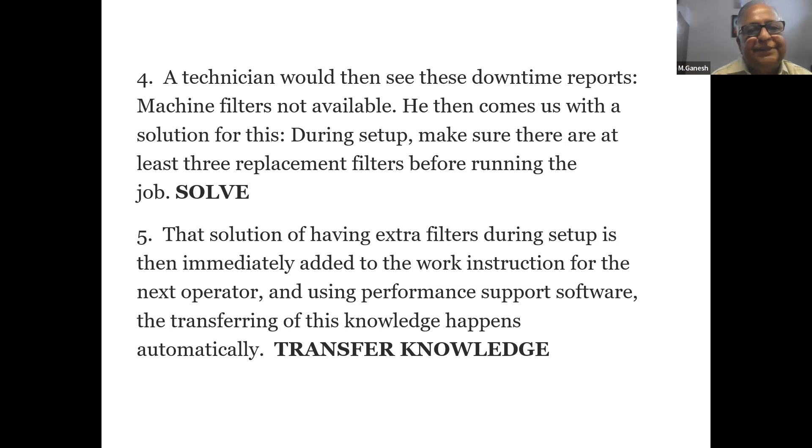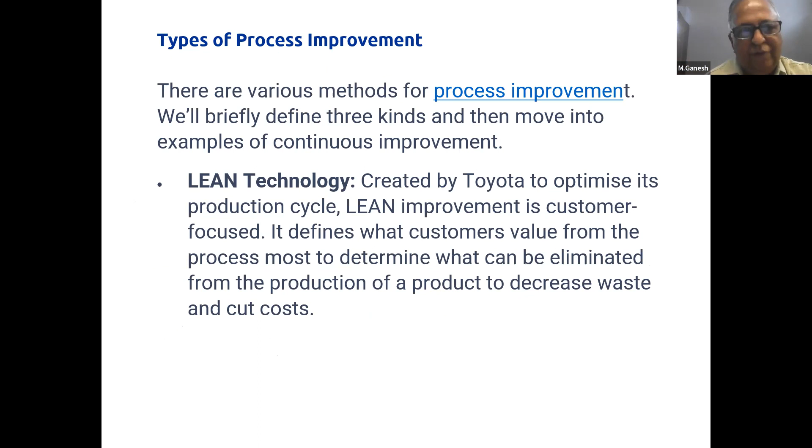Another way of doing this is continuous improvement. We already said what continuous improvement is. In process improvement we can use lean technology, which Toyota has been utilizing well; from there we got to know how popular it became. Improvement is customer focused. Another is Six Sigma, a method that focuses on improving the quality of business processes, limiting process variation to ensure consistency in production. TQM is similar to Six Sigma and holds all involved parties responsible for producing quality, right from top management to the last level of employee, for the total quality of the entire manufacturing process.

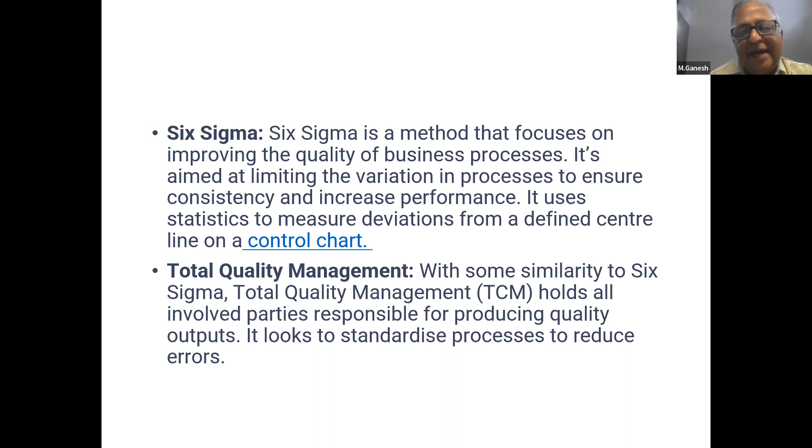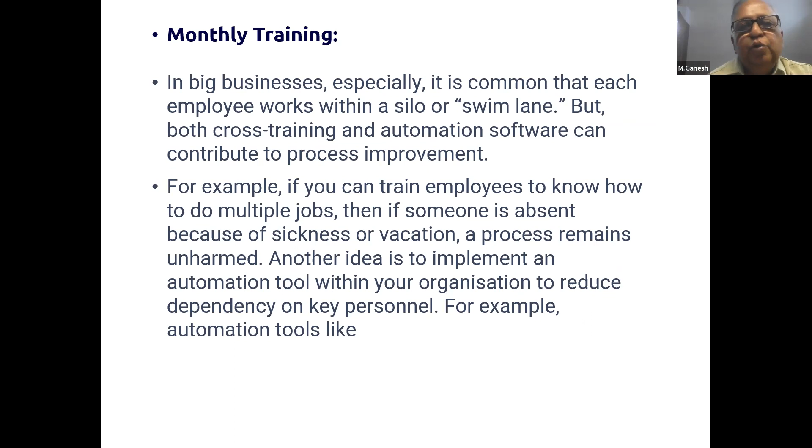We'll just see a few examples. We have to do a survey, since people who work with the organization are most well-versed. As I already told earlier, by taking care of your people, their involvement can give you better results. Then it is common that each employee works in a silo. If he is working as an individual, we have to use cross training with automation software. They may have been doing certain activities in their own way for many years, but if we want to improve efficiency, we have to go for certain automation, and those people have to be trained in it.

Time audits: we have to look into every activity, what time is being taken, whether there is any hold-up time, whether employees are idling anywhere or machines are idling anywhere. These things will give you scope for further improvement in the efficiency of manufacturing.

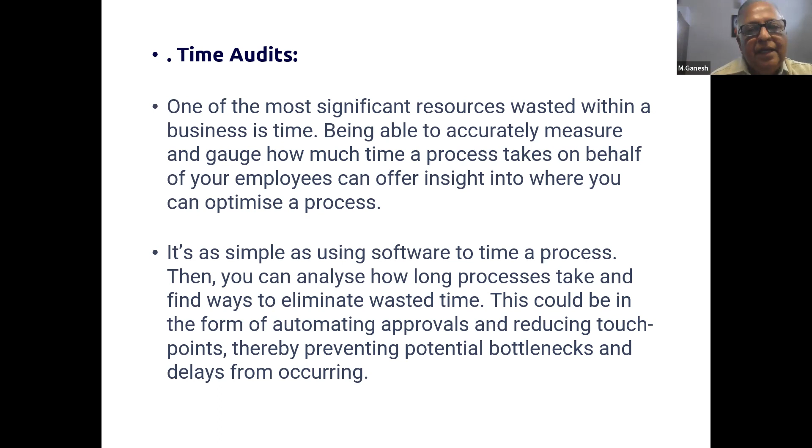Then this is another aspect. Catchball is a method of continuous improvement that requires the person who initiates the process to clearly state the purpose and concern to others involved. In this way, we can throw it out to the group for feedback and ideas for improvement. Yet the single person remains totally responsible, but he takes feedback from other co-workers or employees to get better ideas to resolve it.

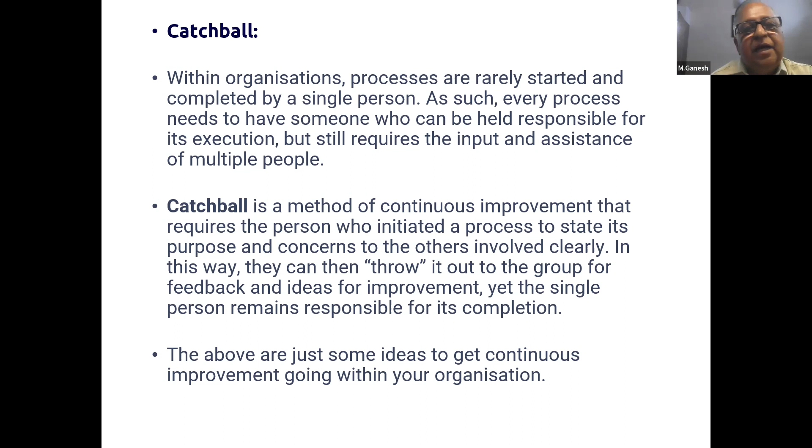Here are some breeds of waste in the business which we are normally aware of: timeliness, system downtime, errors, manual data errors, people, an underutilized workforce, excessive management, production, overproduction of printed documents. These things become the basic wastes.

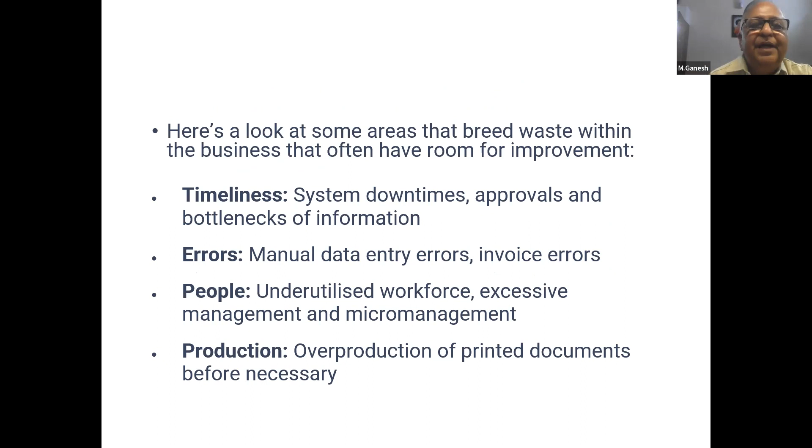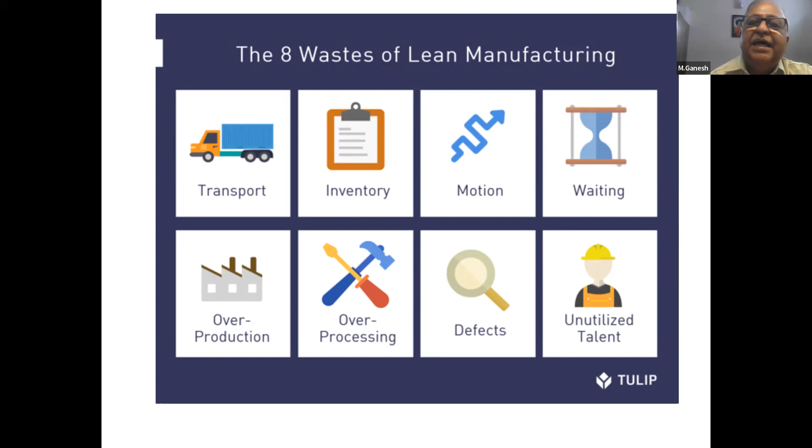You can see it in pictorial form: transport, inventory piling up, motion, where there's a time delay, waiting, idling, overproduction, over processing, defects, whatever defects we come across during manufacturing, and unutilized talent. The people are quite good talent, but they are unutilized, not able to reach their full efficiency for better manufacturing. So this is lean process improvement.

So these are the 7 normal wastes which we have already discussed in pictorial form: overproduction, inventory, transportation, motion, waiting, defects and over processing.

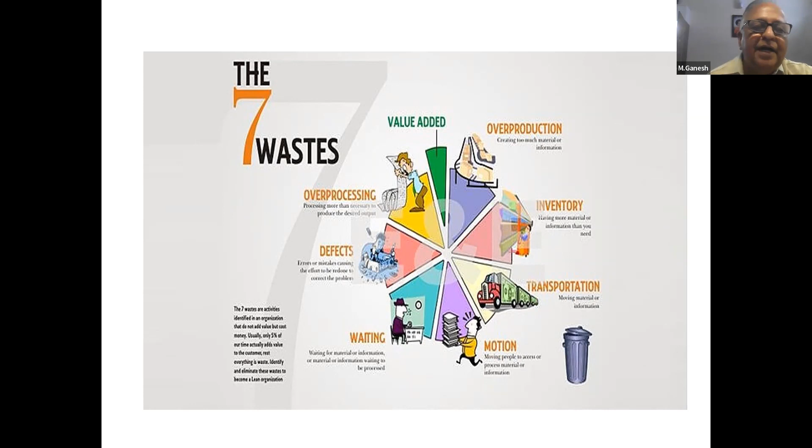So this is TQM, total quality management. The first thing it starts with is a focus on the customer. That will be the key, because the entire business depends on the customer. The customer is always right. So we have to ensure that customers' needs and expectations are satisfied by means of TQM, by ensuring employee involvement, being process oriented, integrating all the systems, and a systematic approach.

Decision making based on facts is a very important aspect. Whatever the issue or problem, we should not link that problem to a person. It's not person based, it's system based. Wherever an issue arises, a lot of blame game goes on that will completely spoil the entire manufacturing process. We have to find out why the issue happened and how the system has to be improved, so that the concerned person is aware and these things will not get repeated.

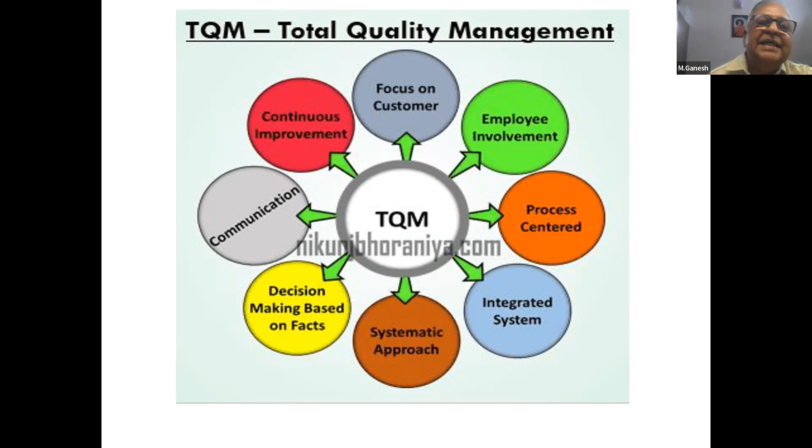That's why communication is very important. The communication matrix for every level of people has to be clearly identified. Finally there is continuous improvement, which is a cycle we normally call the PDCA cycle: plan, do, check, act. Then the Kaizen approach: brainstorming, measuring, comparing, innovate, standardize, and repeat. This also goes into continuous improvement.

There are various lean manufacturing tools. Each organization, according to their need, requirement and size, uses different types of lean tools. Another way to identify the problem is the 5 whys. If there are any issues, we have to go to the root cause by means of 5 whys analysis. The last why will identify the root cause, so once you separate the root cause, the problem will not get repeated again.

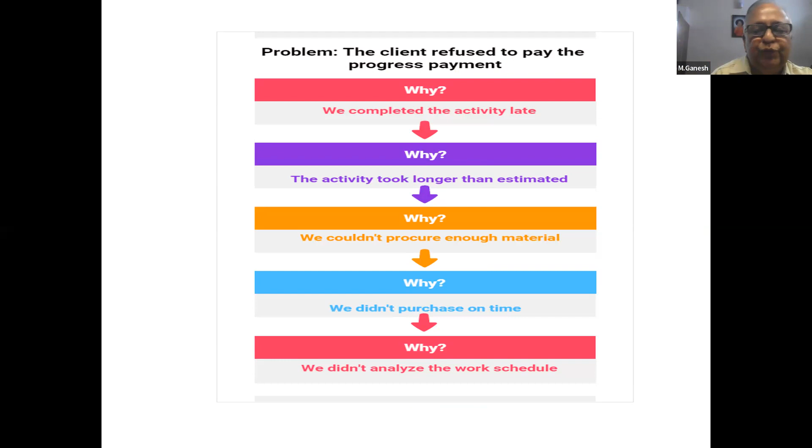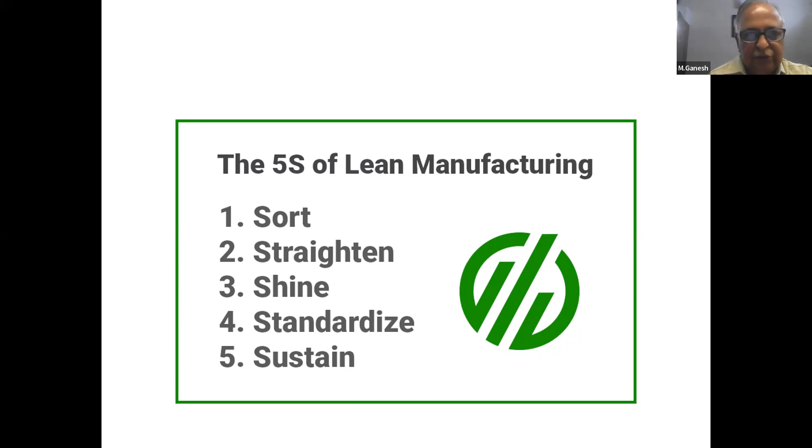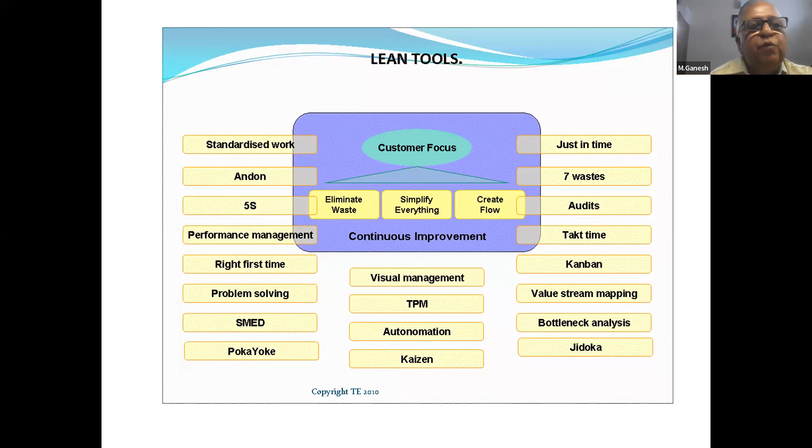Then 5S in lean manufacturing: sort, straighten, shine, standardize, and sustain. This is also a very good way of ensuring lean manufacturing. Other lean tools are available: just in time, visual management, right first time. Whatever work we do, we do it right the first time, so there is no question of defects and rework. To avoid rework, every engineer finds solutions for problems to ensure improvement. So engineers become the backbone of the entire manufacturing process for improvement. Thank you.

Thank you, Mr. Ganesh. We had very interesting and informative sessions from Mr. Ashok, Mr. Balamurugan, and Mr. Ganesh. Ashok stressed the various energy aspects of the utilities and ancillary units, how they have to be monitored, and how new generation equipment will be more energy efficient.

Mr. Ganesh stressed cost reduction through waste reduction, using various tools like lean tools, Six Sigma, 5S, TPM. He also stressed continuous improvement and TEI, total employee involvement, and training. He briefly explained the various tools which can be utilized, and the need for system-based management, so that we have cost reduction through waste reduction.